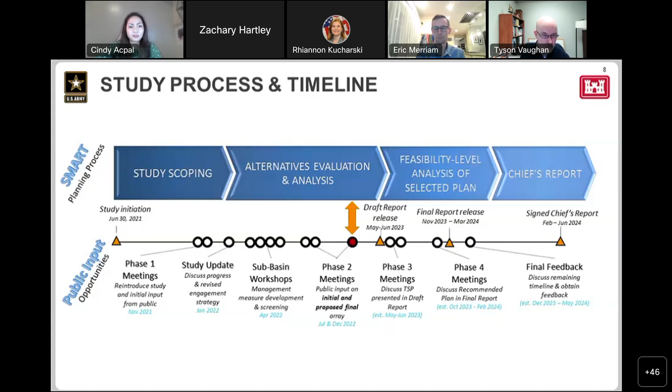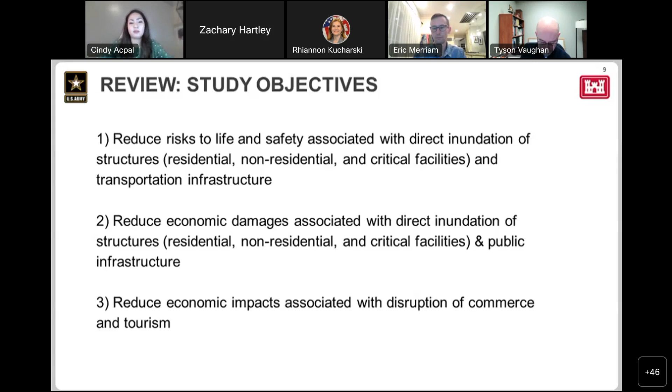As a review from our previous meetings, this study has 3 primary objectives: to reduce the risks to life and safety associated with direct inundation of structures, residential, non-residential, and critical facilities, and transportation infrastructure; to reduce economic damages associated with direct inundation of structures and public infrastructure; and to reduce economic impacts associated with the disruption of commerce and tourism. We'll be coming back to those study objectives when we start talking about how we develop some of our management measures.

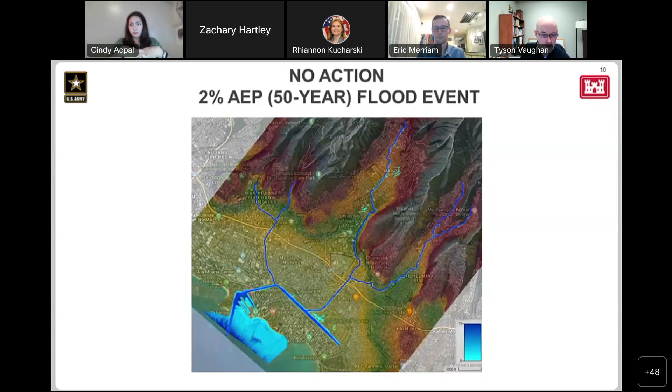Cindy, I'm going to have to jump out of the slide deck here to show you guys this animation. Let me see here, hold on just a second. Share screen. Okay, I'll play the slide for you and you guys can see this animation. Hey Tyson, before you click play, can I— oh never mind, you've already clicked play. No problem, I can go back. Do you want to set it up? No, I know there's some people who may not—this might be one of their first public meetings, so I wanted the opportunity to get everyone situated with the watershed itself.

This is a beautiful flood animation. At our last public meeting in July, someone asked the question, well, where's the flooding? So we thought it might be easiest to show you with one of these flood animations. You might have seen something similar before, but that previous video was specific to the 100-year event. This animation is specific to the 2% annual exceedance probability, otherwise known as the 50-year flood event. This is the no action alternative, which we sometimes refer to as our future without project condition.

For those not too familiar with this watershed: to the far left is Makiki Valley, and within that you have the Kanaha Ditch, which converges with Makiki Stream. In the middle is Manoa Valley with Manoa Stream running from north to south. Right where you see that massive horseshoe-shaped bend in the middle of Manoa Stream, that's where Woodlawn Bridge is located, and much of the flooding seen in the 2004 Manoa flood stems from that area. On the far right is Palolo Valley with Palolo Stream converging with Manoa Stream, turning into the Manoa Palolo drainage canal.

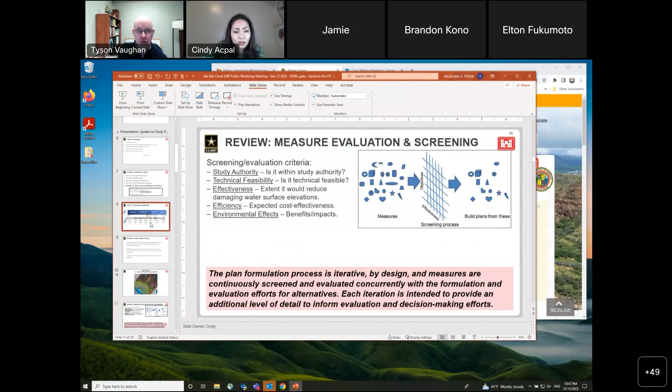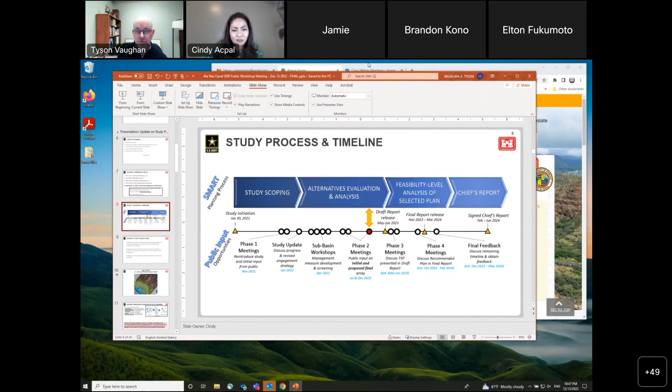Do you want to say anything else on this? Hang on a sec, I'm going to go back to the slide deck—is that all right? Yeah, that's fine. We were unable to post this video to the website because of its massive size. We tried transmitting the slide deck with the video embedded in it, and that's why Tyson has to jump in and out of it—the video size is just too large attached to the presentation. But we will try to get it up on the website somehow.

We also have a version of this for the 5%, or 20-year, flood event too, which if people are interested in, we could put that up there as well.

This video really was for some of you who live in the area and are just curious what it is that the Army Corps is really looking at in terms of flood models and animations. The question was asked at our last meeting, 'show us, we can't imagine it, just show us.' So that's what we're trying to do here in providing these animations.

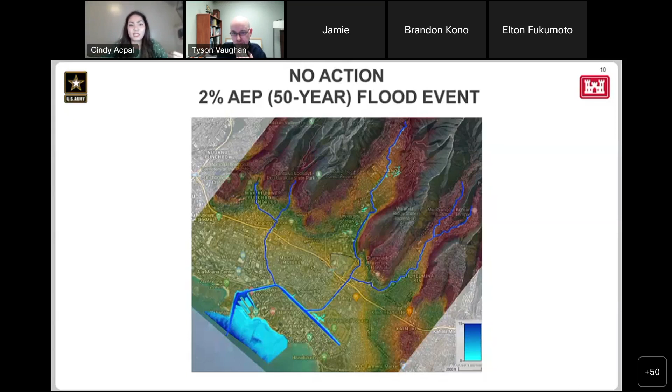Even from the animation, you can see specific areas within each of the watersheds, the subbasins, where it's projected to overtop, such as at the Woodlawn Bridge. Our study team tried to focus on some of those specific areas when we were in the process of developing the management measures. If we can move on to the next slide, please.

Moving into the management measures, we started off with about 230 management measures, many of which were proposed by the community as well as a technical team. We then started the process of screening through those measures using the screening criteria listed here, such as: is it within the study authority? Is it technically feasible? To what extent would it reduce life risk and or economic damages? What is the expected cost effectiveness? And what type of environmental effects could we expect?

In this visual, you can see that we started with 230 management measures on the left, and through our screening process, we were able to reduce that number down to about 50. From that, we were able to develop alternative plans. Next slide, please.

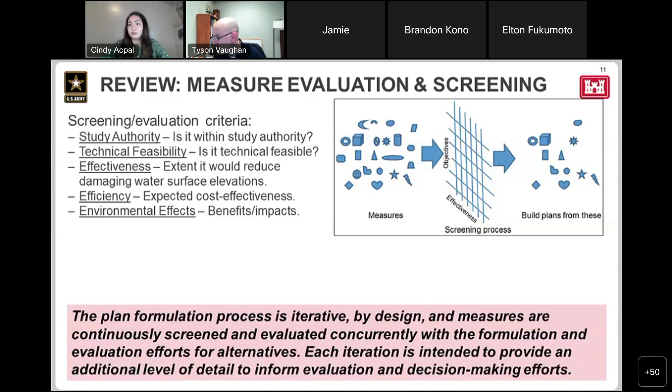The plan formulation itself is a process of combining measures to make an array of alternative plans that meet study objectives again. Going back to what I previously talked about, the study objectives are to reduce life and safety risk throughout the watershed, to reduce economic damages associated with flood and inundation, and to reduce economic impacts to commerce and tourism.

We then take these remaining measures, which meet those study objectives, and combine them into an array of alternative plans, which you can kind of see in the visual at the top, where you see a whole bunch of different shapes combined to make different plans. In this case, we took our 51 remaining management measures and combined them into an initial array of alternative plans, which we presented at our last meeting back in July.

Due to the large number of management measures and possible combinations, it required a deliberate process of formulation. That's where we discussed last time our cornerstone approach, where we identified various conveyance strategies, storage, natural and nature-based, and then a hybrid plan as part of our initial array. Formulation itself is an iterative process with successive iterations increasing in detail.

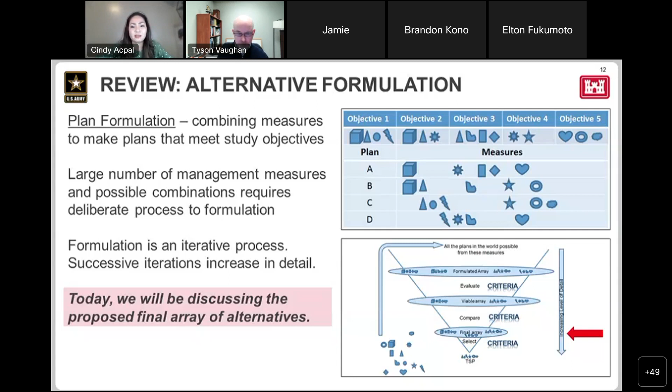As part of the evaluation process of alternative plans, we used the following evaluation criteria. Is it complete? Does it include all the actions necessary to meet study objectives without the need for other actions to achieve the desired effects? Is it acceptable? Is it consistent with laws, policies, and regulations?

Is it efficient? This is where we do a preliminary cost to benefit analysis. Is it effective from a life safety perspective? To what level does it reduce inundation or water velocities and impacts to critical infrastructure such as hospitals, fire stations, shelters, as well as impacts to transportation infrastructure, our roadways, like how quickly can our ambulances get from point A to point B?

We also look at, is it effective from an economic perspective? To what level does it reduce inundation or reduce damages? Then from a comprehensive benefits analysis, we look at both environmental effects and social considerations, from a qualitative standpoint as described here. Next slide, please.

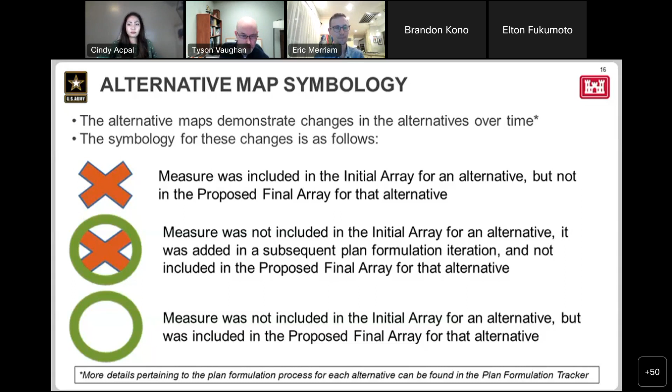I'm going to walk through this first one. Each of these alternatives, I'll show the version we originally presented back in July, the initial array, and then step through how it has changed. Alternative one was our storage cornerstone - the cornerstone being those pieces that we ultimately built the plan around. The cornerstones in the storage alternative were the Makiki District Park Detention and the associated flood wall that would help route water.

So the Kanaha flood wall would route water into the Makiki Park Detention Basin, the Manoa Valley District Park Detention Basin, as well as the Ala Wai Golf Course. So those were kind of the key cornerstones.

And then from there, we built out, understanding what that would do to flood risk. We built out additional measures as needed in ways that we thought we would need to reduce residual risk. And so you can see all of those additional pieces that kind of came into play here.

We had a detention basin in Palolo, some flood walls down along the Ala Wai Canal and Koali Road, and some measures at Woodlawn Bridge. And I remember we had a lot of discussion at the last meeting about there being a lot of potential opportunities at the Woodlawn Bridge to reduce risk there.

We had been trying various combinations of these, but we weren't quite sure yet. So we had a lot of different options there, and we've really kind of narrowed those down.

Okay, so that's kind of the alternative that we presented in July. So then Tyson, step forward.

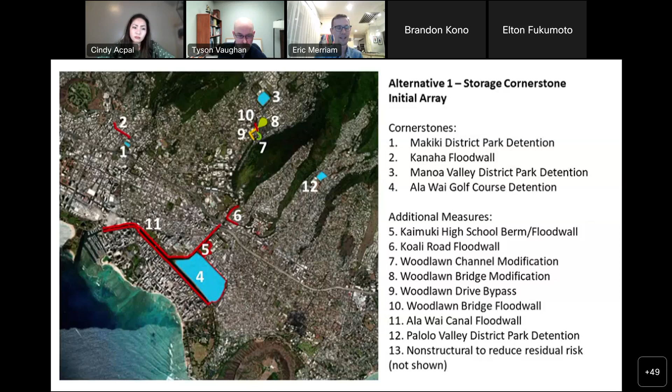So this next slide is a little bit busier, and I apologize about that. But what it does is it kind of steps through all of the iterations. So up at the top, it says there were 4 different iterations of this alternative that we ultimately went through and analyzed to end up where we got to today.

And so just a few things that I want to highlight. I understand that it's busy, and again, all of this is in the plan formulation tracker, but I do want to highlight a few of the major changes.

So the first one is, you can see down in the bottom right-hand corner, we actually looked at adding a detention basin at Kapiolani Park. The intent was to use existing infrastructure to pull water from the canal, store it in Kapiolani Park, and then discharge it out to the ocean.

Ultimately, we found out that measure was going to be too costly. We couldn't use gravity flow to get water there, we would need pumps, and it would have to be very large. There were also issues with the groundwater table. So for a lot of technical reasons, ultimately that was screened. That was one that we added, thinking it might work in an iteration, and then we ultimately screened it.

You can also see that there were a lot of measures, as I mentioned, up in Woodlawn, and ultimately we screened out a lot of those. You'll see on the next slide that really we landed at the Manoa Valley District Park Detention Basin and a flood wall right near the Woodlawn Bridge. Those two together were the solution that best addressed the risk there at Woodlawn and prevented water from jumping the banks.

The other big piece, and Dave, you had asked in one of your emails earlier, why was the flood wall screened from this alternative, but none of the others? And that's a great question. You're right, it does seem inconsistent.

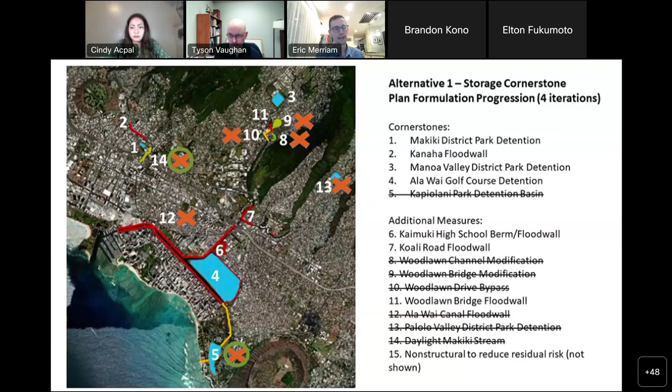So the third step is the same alternative, still the storage cornerstone. This is our proposed alternative for the final array. It maximizes storage in the golf course, the Makiki and Manoa Valley District parks, and then includes a few flood walls to reduce risk at the Woodlawn Bridge along Koali Road. We also have, not necessarily a flood wall, but a berm around Kaimuki High School, which allows a little bit of storage while also reducing flooding in the neighborhoods just north of the Ala Wai Golf Course. Again, this doesn't have a flood wall — we're trying to maximize storage and see what we can do with a solution that doesn't include one. Okay, next alternative.

The next alternative we presented at the last public meeting was one of the conveyance cornerstone alternatives, looking at bypasses and maximizing utilization of existing storm drainage infrastructure. This included the Pi'ikoi bypass, the Woodlawn Drive bypass, culverts that took water from Palolo out to the ocean, culverts or tunnels that took water from the canal underneath Waikiki, and ultimately the Paki Avenue bypass that took water from the east end of the canal out to the ocean.

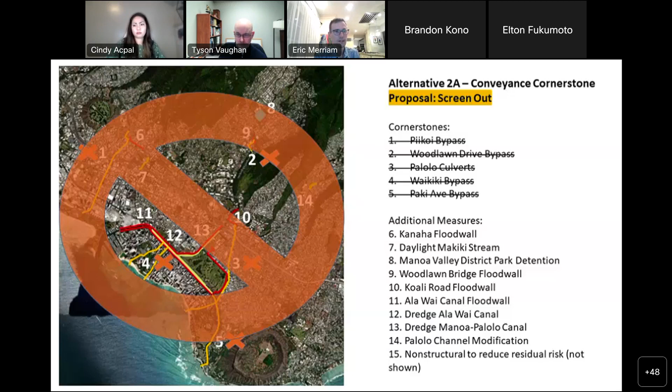Okay, so the next alternative was alternative 2B, and this was also a conveyance cornerstone, but instead of focusing on bypasses and existing infrastructure, it focused more on flood walls. So this was our flood wall heavy alternative, where all the flood walls were a cornerstone: the Kanaha flood wall, the Woodlawn Bridge flood wall, the Koali Road flood wall, and the Ala Wai Canal flood wall. And then again, we built out measures around it.

So we had some tunnels underneath Waikiki and a tunnel on the eastern end of the Ala Wai Canal to try to lower the height of those flood walls. If we could expedite water exiting out of the canal through various other pathways, then maybe the flood wall wouldn't need to be as high. And so we did look at other measures as needed.

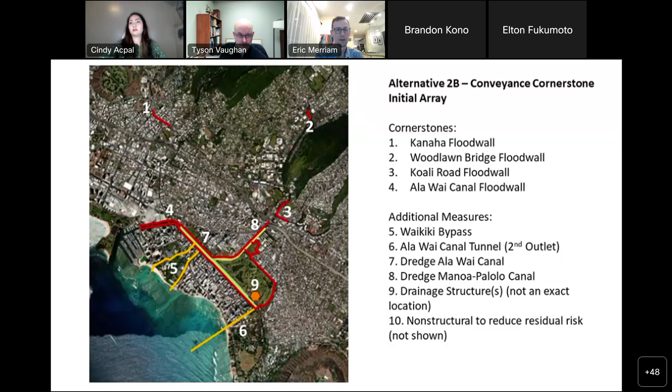And ultimately, so Tyson, that was kind of the intent of the initial array of alternatives for this alternative. So move forward to the next slide, Tyson.

We did go through 3 iterations of this alternative. Ultimately, a lot of those secondary alternatives were screened out. So again, the Waikiki bypass, some of those bypasses underneath Waikiki and the tunnel on the east outlet end, those were all screened. They were not effective. We also looked at dredging in conjunction, so if we could increase the depth of the canal or the Manoa-Palolo Canal, maybe we could reduce the height of the flood walls. Ultimately, that was screened out as well.

We also looked again at the Woodlawn Bridge area. So we have the flood wall, and we looked at adding in a couple other measures, specifically the Woodlawn bypass. And ultimately, the Woodlawn bypass we found wasn't really necessary if you have the flood wall there, and the flood wall was a more effective way at preventing water from jumping the bank there. So ultimately we added it, the bypass, but then screened it back out.

And then the only other thing to note here is we did add in the Makiki District Park, because it functions in coordination with the Kanaha flood wall. So if you have a flood wall along the Kanaha ditch, effectively you're keeping water in the channel, and that's just additional water that would flow down through the channel through Makiki. If you add in the Makiki District Park there, you're able to store some of that water as well as additional water coming down throughout the watershed. So it's another great measure that we added in that ultimately did get retained into the final alternative.

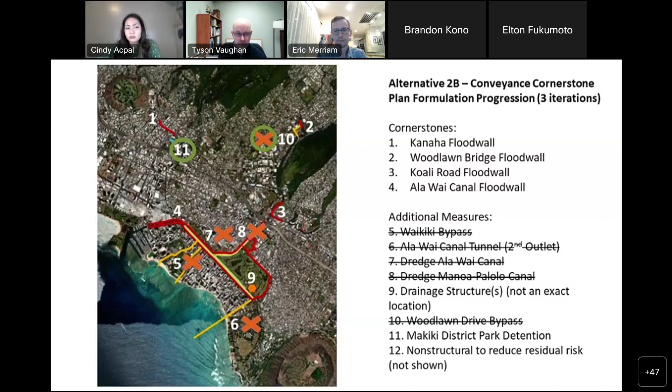Okay, so moving forward, Tyson. So this is what the all-flood-wall alternative ultimately turned into after all of the iterations. It really is essentially a flood wall heavy alternative. We have flood walls at Kanaha, Woodlawn, Koali Road, and then we have the flood wall system around the canal.

I want to note that number 6 there is drainage structures. Right now in our modeling, there's been a lot of talk about pumps throughout the course of these meetings. But in these alternatives and through the modeling runs we've done, right now we're not showing that we need any pumps. What we're looking at having here are more flap gates.

Sydney, you asked a question earlier about the height of the flood walls, and I told myself on the first flood wall alternative I was going to talk about that, and I didn't, so I think right now is an okay place. So for all of these alternatives, the flood walls are assumed to be the same height.

We made some assumptions whenever we started going in and looking at this final array, because we're just trying to develop these plans so they can be compared against one another. So essentially what we did is we assumed flood wall heights currently of about 6 feet, and there's a number of reasons why we did that. One is that it hits that sweet spot of the 20 to 50 year event.

We've talked a lot about this in previous studies, where we're the third go around at looking at this. The first two efforts ultimately landed at the 100-year event, and they were unable to find a justifiable project at that level. So we used their data from those studies, the benefits they calculated, and the costs for a lot of things. We found that more realistically, the 20 to 50-year event is probably the optimal event where we're able to maximize benefits while minimizing cost. And again, not just economic benefits, but life safety benefits and other social benefits as well.

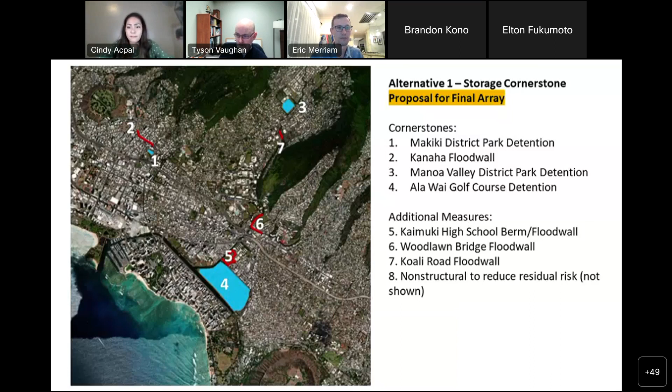But we can get a little bit more into detail on the designs as we move forward. So I'm trying to answer some of these questions, Cindy, that you and others had asked, and they're great — we do have that information, we're trying to get to that level of detail. Okay, sorry, took a detour there, Tyson.

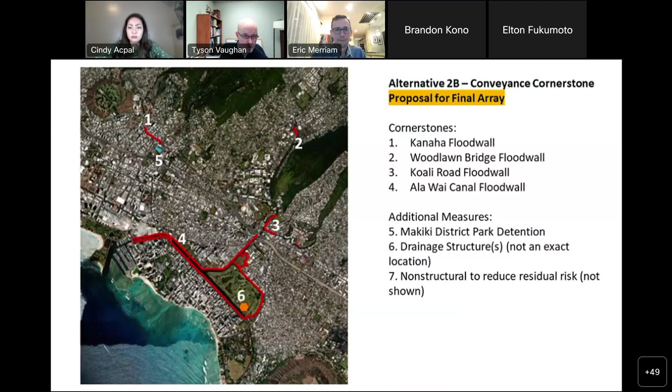No worries. Where did you land before? Let's see, was it... back? There, no, back. I finished on the flood wall. Wait, okay, I'm just going to step through it.

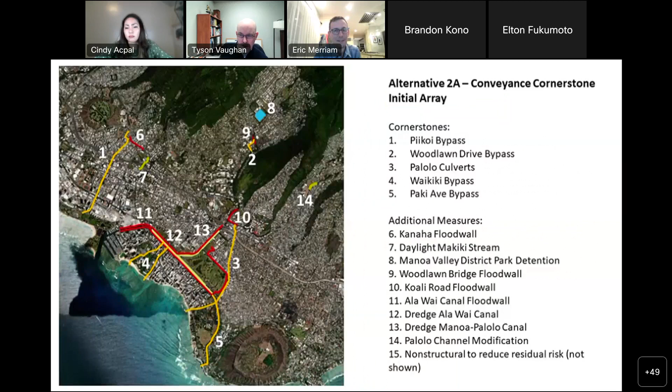Okay, conveyance. All right, stop. Stop here. Back one more.

Okay, that's right. So the next alternative, the third conveyance alternative - I just had forgotten to say some of that stuff and wanted to make sure I had it while it was on the tip of my mind. So the next alternative, also a conveyance alternative, focused on the second outlet. I know the second outlet has been proposed in other study efforts as well, but we wanted to take a look at it again with our unique spin on it.

The second outlet is a daylit, open outlet on the eastern end of the canal. The team modeled that, meaning we simulated implementation through our models to see how it would affect the hydraulics. Unsurprisingly, it did reduce water surface elevations to some extent.

However, we also started developing costs for that alternative - looking at excavation costs, costs to construct new walls along the canal, and so forth. What are the real estate costs? What about bridges that need to be put over the canal? All of these things started adding up.

It became clear that the costs were going to be too great to justify the benefits from an economic perspective and a life safety perspective, especially considering other measures on the table that would be equally effective at far less cost. So we took this alternative as far as we could - we started developing costs for it, we modeled it, and ultimately we just couldn't get there. So the second outlet was ultimately screened.

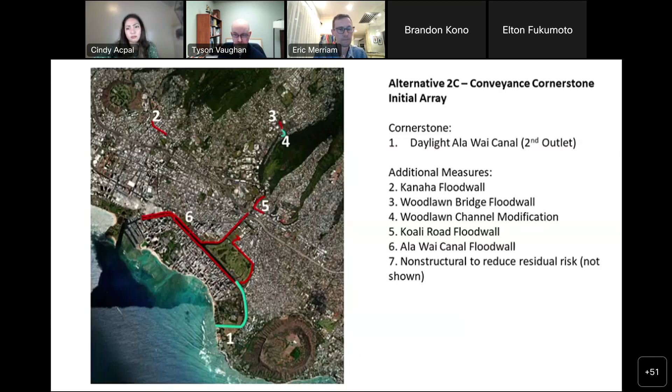Because that was the only cornerstone in this alternative, and that cornerstone screened, ultimately we're proposing removal of this alternative from the final array. That's all the next slide shows - just a note that we'll be screening this likely moving forward.

The other thing I'd like to mention is that we considered costs - we developed preliminary costs, we looked at preliminary benefits, reductions in water surface elevations, potential damages. We also talked a lot about this alternative through the environmental coordination process. There are significant environmental concerns with a large scale outlet like that, which would essentially cause water to be pumping out of the canal 100% of the time.

That's a national marine sanctuary right there - critically preserved habitats from a marine standpoint, as well as other things. So environmental effects come into play when we start talking about screening.

Dr. Minervi asked that question earlier in the chat, and others were asking how environmental considerations are incorporated into the screening criteria - and they absolutely are. Especially with respect to a lot of these measures that were essentially secondary or additional outlets directly to the ocean, those had some of the greatest environmental impacts and resulted in the greatest environmental concern from our partnering environmental agencies and others. So environmental considerations absolutely were included in screening criteria, and they will absolutely be incorporated into evaluation and comparison criteria moving forward.

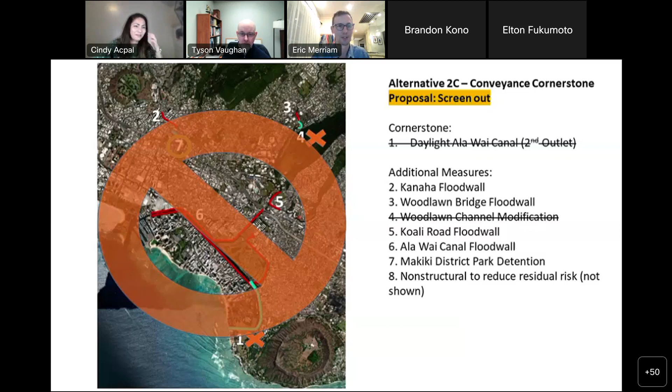Okay, sorry, I keep going down tangents, just trying to answer questions as I move. It's all good.

Okay, so alternative 3 - am I talking too long, Tyson? Do I need to hurry up?

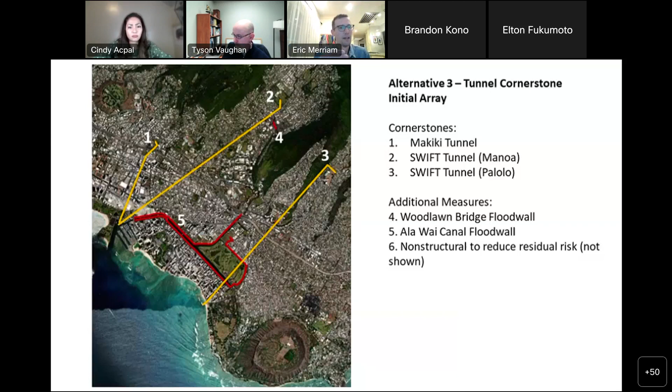What we did is update the costs from the last iteration when these tunnels were looked at. We updated the cost, updated the H&H modeling — we put these models in and looked at what they did and how much they lowered water surface elevations upstream as well as down the canal. So we did a full analysis, going through 6 iterations of this alternative.

We looked at combinations of tunnels, adding additional measures like storage areas at the golf course, and additional bypasses like the Piikoi bypass. We tried to look at all iterations we thought would be possible to reduce costs — maybe one tunnel with other measures, two tunnels pulling other measures in. But ultimately, through those iterations, we weren't able to identify a plan that would be cost effective.

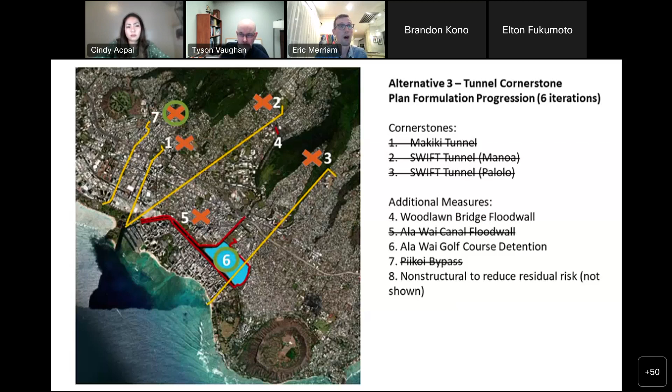When we talk about benefits, it's not just economics, it's also life safety and others. So yes, they altered hydrology and hydraulics, but not to the extent we'd be able to justify the cost. I'll say the cost in the last iteration did not incorporate things like real estate, construction management, and cost for planning, engineering, and design. Once we added all of that in, it increased the cost to the point that the tunnels were not going to be justified, any one individually, all combined, or any combination thereof.

And so because of that, ultimately, this alternative was screened, or we're proposing to screen this alternative from the final array.

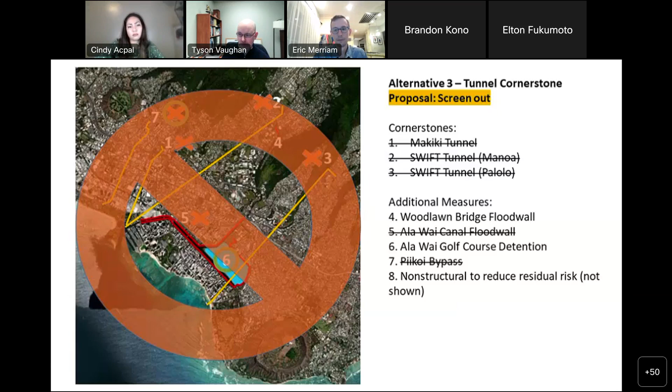Beyond that, honestly, at the time we didn't really know exactly what that was going to do, so we said it might be that and any combination of other things. There's a lot going on here, but the primary driver for us was to really dive in and take a look at what those watershed management actions might actually do hydrologically and hydraulically. That's what our team did.

We took our models, ran a bunch of sensitivity analyses, looked at reforestation, invasive management, and went through a bunch of different analyses. Ultimately, our results showed that these measures did change the hydrology — no surprise there, as other studies have looked at this. We expect these measures to affect rainfall runoff and infiltration, so they do have an effect and represent a viable measure.

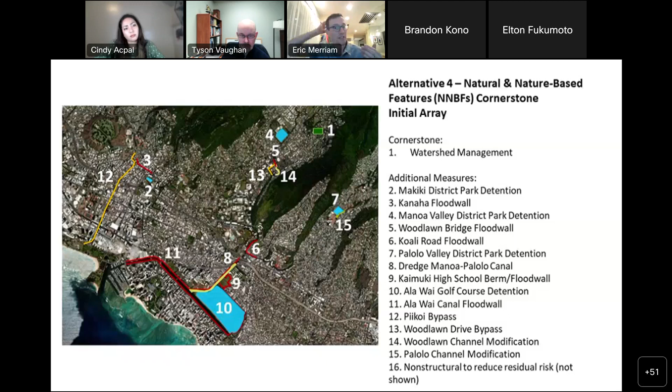But because of that, and I understand this is not ideal news, I'm a river and stream ecologist by background, so these types of measures are also near and dear to my heart. But within the confines of the processes, policy, and guidance we have to follow, ultimately these types of measures within this study appear that they will not be able to be implemented as part of this project. So we're proposing to screen it out.

The only other thing I'll say, and we've said this many times, is that our study, our project, and our recommendation is only one piece of the puzzle in terms of how to effectively manage the Ala Wai watershed. We can address what we can address with our puzzle piece. We can't fill in other puzzle pieces, but there are other avenues that can be pursued to fill those spaces in.

Even though we cannot address those issues with a recommendation out of our study, our analyses are also showing that any recommendation subsequent to ours—say forest management happens in the future—that will not negate anything that our study does. Because our study will be looking at risk and issues caused by these less frequent 10, 20, 50-year events. So that work will not counteract anything we're doing, and vice versa. Together they'll more holistically work to increase resiliency of the watershed.

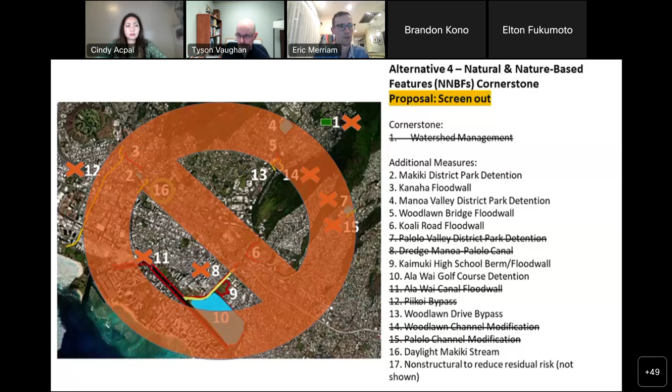So that's kind of where we landed on that. I know we'll talk more about this moving forward into the work groups this afternoon and this evening. Tyson, next slide.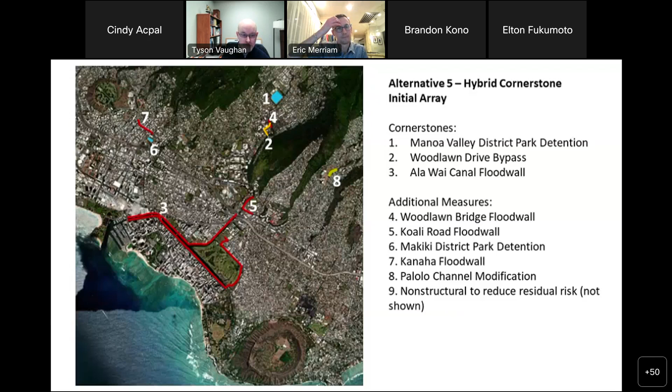Tyson, go ahead and go to the next slide. So we did run through 4 iterations of this as well, and just some big highlights here. Again, when we start talking about Makiki, ultimately we landed on looking at the Kanaha and the Makiki District Park Detention as the proposed solution for Makiki. Up in Manoa, again we had a lot of different things we were looking at, similar to some of the other alternatives, and we really landed on the detention basin and the flood wall.

The other big thing to note here is that we added the Ala Wai golf course detention. So instead of the golf course just being a floodplain, we maximize storage within the golf course by excavation, creating some berms, trying to maximize the storage capacity of the golf course there.

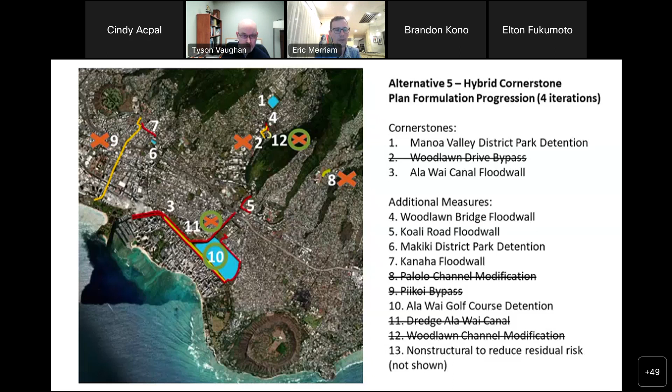So again, it really is combining both storage and flood wall type conveyance solutions. In essence, it's a good hybrid plan for both of those types of solutions moving forward. I think that's all I was going to mention here.

So the final hybrid alternative is the detention facilities at the golf course and Makiki and the Manoa, as well as flood walls at Woodlawn Bridge to prevent water from jumping back there at Woodlawn, the Kanaha flood wall to help funnel water, the Makiki storage area, and ultimately the flood walls at Koali Road and around the Ala Wai Canal.

Okay, so that was a lot of information. I understand that, and I don't expect it all to be absorbed immediately. We have the plan form tracker online that can be looked at. I understand there are some measures that a lot of folks were passionate about that appear like they will be screened out moving into the final array.

I keep going back to the last public meeting, and I think Tyson had this. The last thing I'll say, Tyson— oh, actually, you know what, I'll say this now. I have two more slides. I'm sorry, Tyson had a survey, right?

It was like, okay, which of these alternatives do you prefer? Which do you not prefer? And by far and large, I think the natural and nature-based solution was the preferred alternative. It got like 19 scored preferred, but not too far behind that were the hybrid alternatives, which I think had 16 folks say, okay, this one's not too bad. And then also the storage alternatives, right?

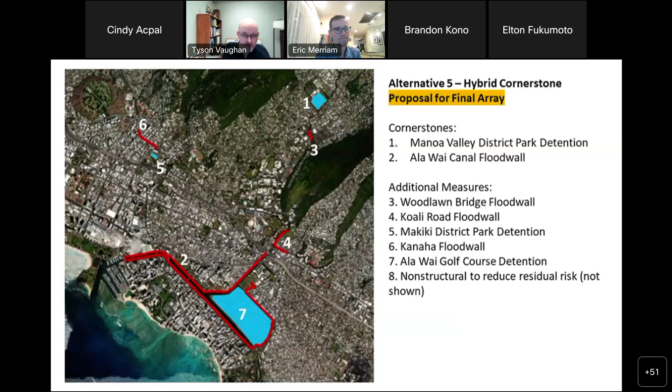So okay, Tyson, move on to the next slide. So again, Tyson mentioned what the proposed final array is, really. So moving forward, what are we going to do? Essentially, the final array of alternatives are the alternatives that we'll evaluate and compare among each other. We'll do so with the metrics and criteria that I talked a little bit about during my presentation.

And Dr. Minervi, to your point, we can absolutely provide a detailed list of what those are and how we're using them as we move forward. And then how final is it, right? I mentioned that we keep using the proposed final array. There will be changes to this, and we will be tracking those changes in Plan Form Tracker.

One of the big changes will be making sure that non-structural measures are appropriately considered. We wouldn't necessarily expect the alternatives to change too much from what they are now, but we will make sure that we consider non-structural measures in place of or in addition to some of the measures in these alternatives. So I use the example of the Koali Road flood wall.

It's a challenging space. There's not a lot of real estate there. It might be an expensive solution, whereas we might be able to go in and elevate some of those homes in that area or in other similar areas, and ultimately that is less costly and reduces risk, especially things like life safety risk, in a better way. And so we will be looking at non-structural measures, and we could expect the alternatives to change a little bit in that regard, but no major changes.

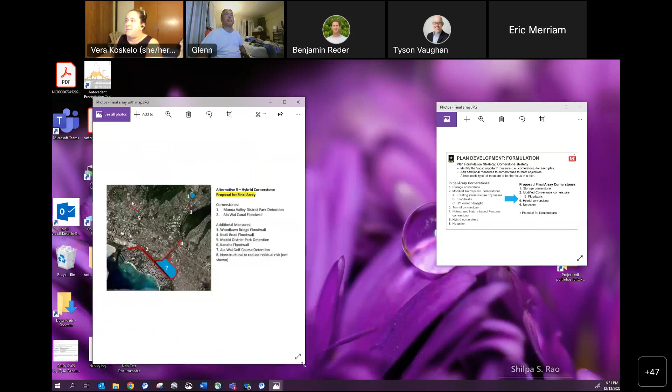So just as a little refresh, I will bring up the slides with the final array so we can refresh our memories and have our conversation. I'm just going to give folks a chance to look at that for a minute, and then we will kick off our conversation. Let me see if I can make these a little bigger.

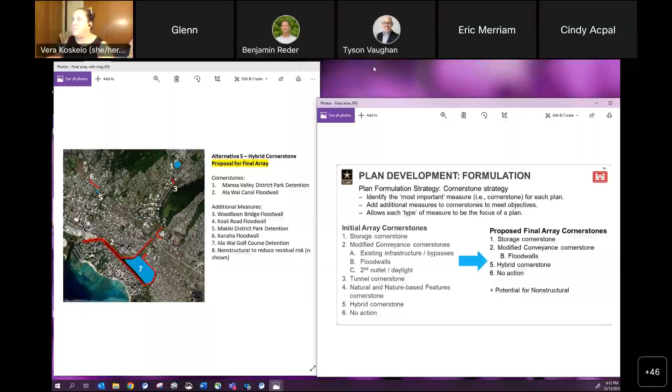Okay, so looking back to the chat, kind of working backwards, it sounds like maybe we're starting with some stuff that you want to make sure the team's aware of. I'm seeing the biggest issue is that the solution does not address the pollution in the Ala Wai Canal. So thank you, Paul, for bringing that up. That's an important factor.

Before that, we heard from Ken regarding—just reading this out loud—because UH has been able to mostly flood-proof the infrastructure on campus. Regarding what Eric said, that even without removing the source of the debris that caused the 2004 flood event, the water would still come over the top and cause the same kind of catastrophic damage to individual homeowners and other commercial property, unless everyone did the same kind of flood-proofing that UH did for their campus. So it sounds like that's a question about more detail on the flood-proofing UH did for their campus and what would be required to provide similar protection elsewhere. Thank you, Ken.

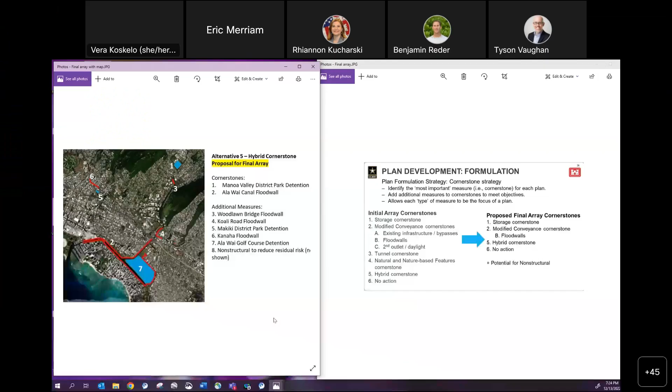On the right, we have the final array cornerstones, including the storage cornerstone, modified conveyance cornerstone including flood walls, the hybrid cornerstone, and the no action alternative. That also includes the potential for non-structural fixes in other locations not addressed by those other cornerstones. The hybrid cornerstone is shown in more detail on the left.

The proposal for the final array would include the 2 cornerstones of the Manoa Valley District Park Detention Basin and the Ala Wai Canal flood wall. Additional measures within this proposed hybrid cornerstone would also include the Woodlawn Bridge flood wall, the Koali Road flood wall, the Makiki District Park Detention Basin, the Kanaha flood wall, the Ala Wai Golf Course Detention Basin, and other non-structural measures that can reduce residual risk, though those are not shown.

So I'll give everybody a minute to look over this, and we'll get back to our main room right after that.

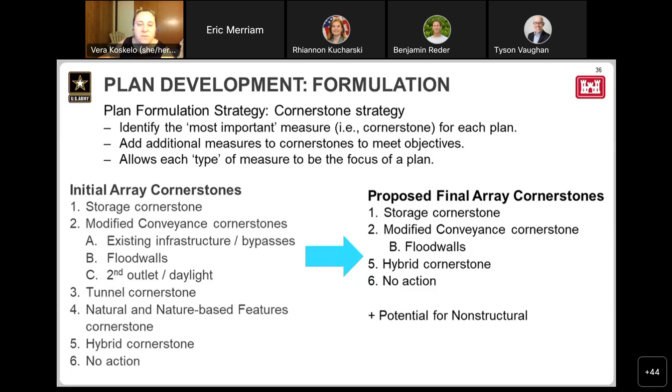Going back a little farther. So what is the proposed final array of alternatives? It's an array of alternative plans to be compared against one another to then select the tentatively selected plan. That selection can be based on technical analysis and evaluation criteria to see how well each alternative meets the study objectives.

So an important thing you might be thinking about as you prepare to share your input is how final is that proposed final array of alternatives? Well, changes can still be made to the alternatives, like measures added, removed, optimized, etc.

Those changes will be driven by further evaluation and analysis, including input from all of you. Non-structural measures will receive additional consideration. However, once screened out, those alternatives are unlikely to be reincorporated into the final array of alternatives.

So this is what I showed a little earlier, the hybrid cornerstone proposal for final array. The cornerstones for this option include the Manoa Valley District Park Detention Basin and the Ala Wai Canal floodwall, with additional measures including the Woodlawn Bridge floodwall, Koali Road floodwall, Makiki District Park Detention Basin, Kanaha floodwall, the Ala Wai Golf Course Detention Basin, and other non-structural measures to reduce residual risk.

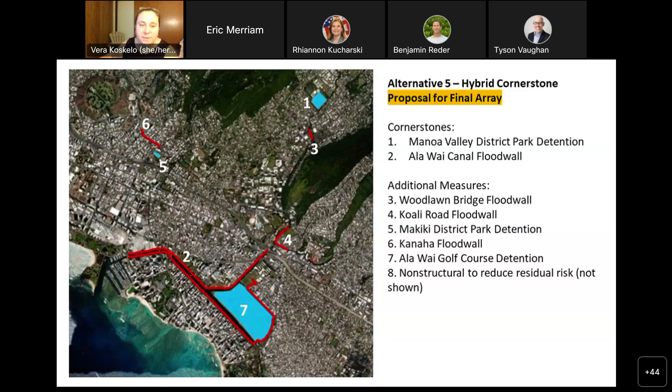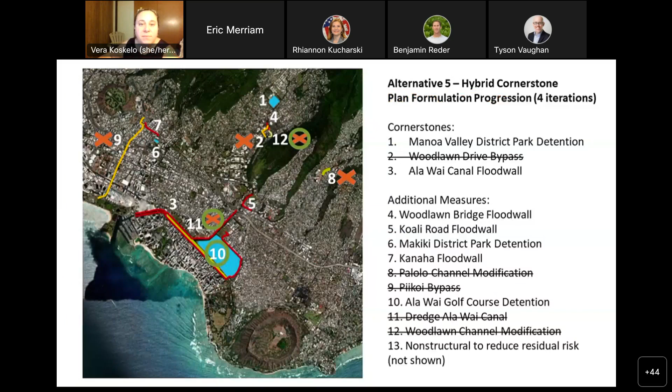And so this is showing some of the options that were screened out from the hybrid cornerstone plan. And this is sort of what that hybrid cornerstone had started with.